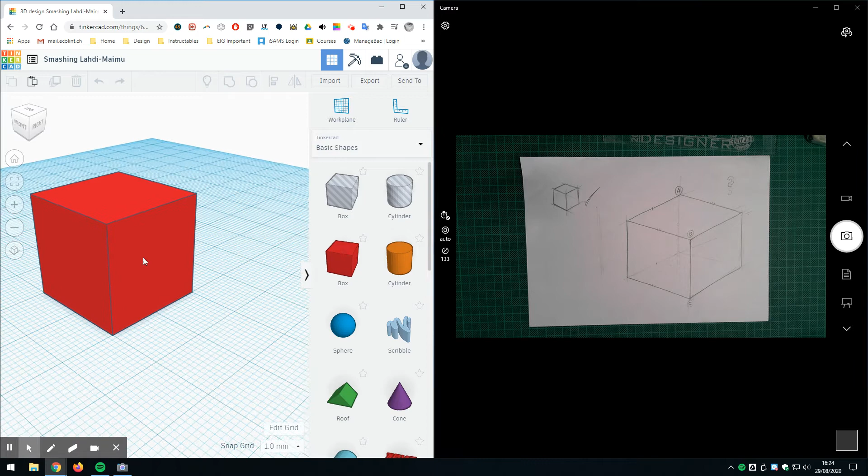Let's spin this around a little and try to redraw it. Shift and right click to reposition it. I was talking about points A, B, and C on the drawing, and now I've got my little menu here. Let me give myself an A - I'll change the color so you can see it against the red block.

This is going to be B, and there's C down there. So better late than never, I guess. That's how I've translated that to A, B, and C.

Good, right, let's just see - can I hide tools? I want to get the eraser. There we go. Good, that's got rid of those. Oh, there we are, wipe screen clear. That would have been helpful as well, wouldn't it? Oh well, next time we'll try that.

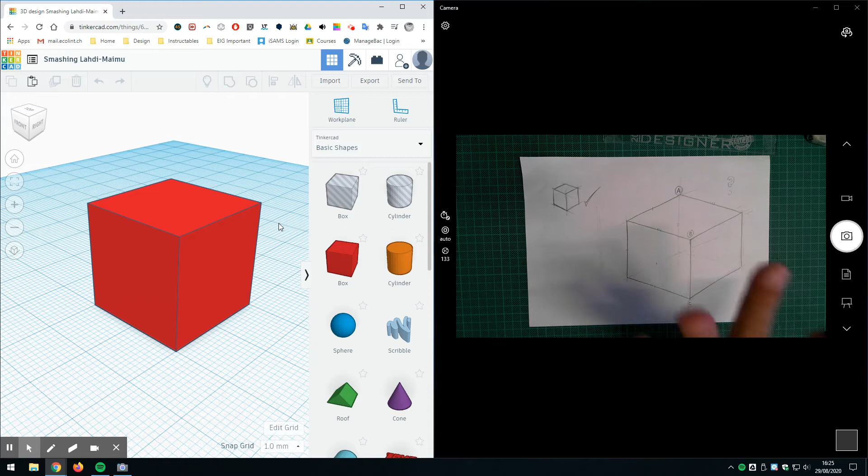Right, okay, so what I want to do now is try and make a bit more of a complex object and then have a go at drawing that. For this I'm probably going to need a new piece of paper - I've done double-sided on this piece here, so let's start a new sheet.

Good, okay, I'm going to zoom out a little bit here and bring in a new box. I think I might just go full size here - that might be easier. Let's click and drag a new box in, and I'm going to place it right there like that.

Again, I'm positioning it quite carefully on the grid here so that they are aligned. What I'm going to do now is drag this up so that they are touching like that. Beautiful.

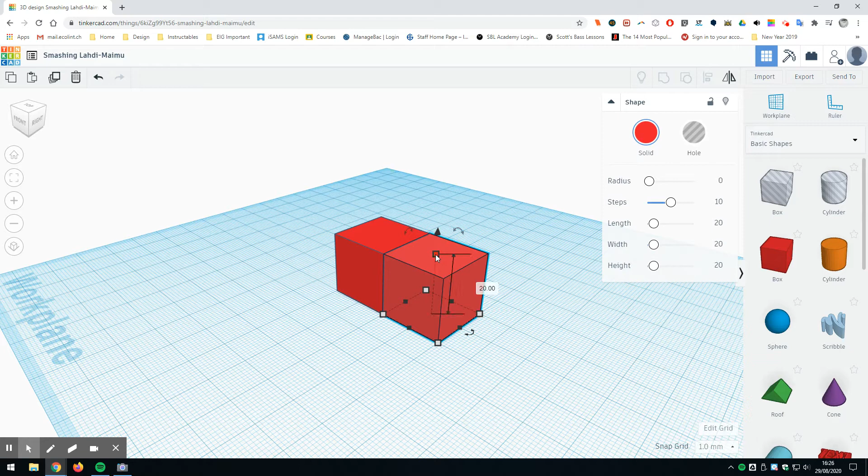Now with this new block selected, I'm going to come to this handle here - this shows it's 20 millimeters in height, and I'm going to drag it down to 10. If that's a problem, I can simply click on that point, click on this text box, and just dial in 10, enter on the keyboard. Now I've got this little kind of series of steps.

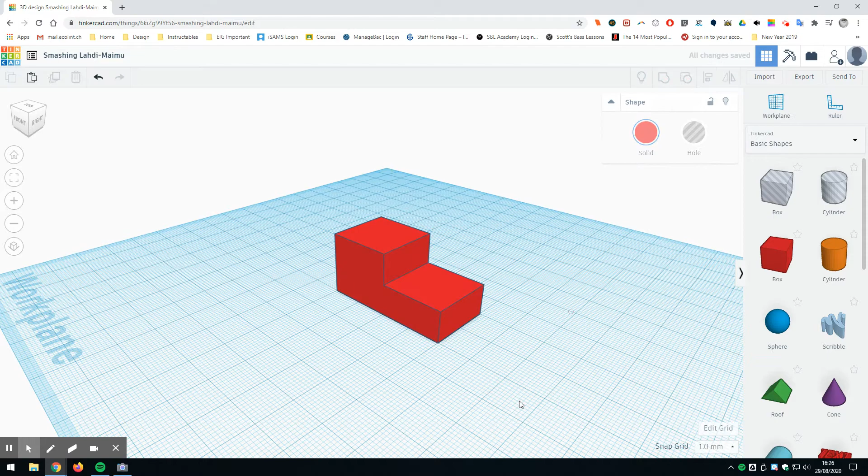The last thing I'm going to do here is put a bounding box around both objects, and I'm going to go to - where is it now - there it is, Group. I'm going to group that together, and that now makes this into one solid block. Okay, that's pretty cool, I'm liking that a lot.

Okay, and I'm going to try and draw this again now in 3D. Let's just select it, and to help myself here, I'm going to make this into a wireframe model. Now, at this point, I just want to talk a little bit more about the wireframe view here.

You can see here that the object is filled in with this gray hatched kind of fill, but you can see all the wireframe views here, and they're not indicated in terms of which is in front and which are hidden lines behind. Sometimes you get the hidden lines as dotted lines, which does help understanding a little bit, but in Tinkercad it doesn't do that.

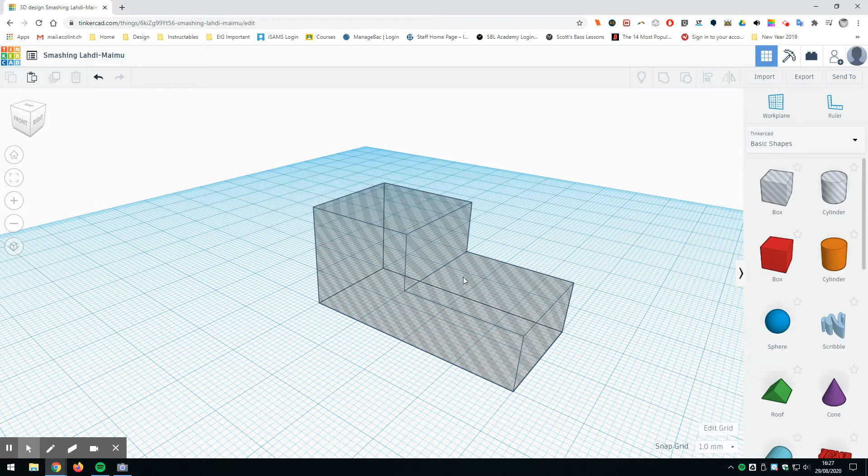But as I right-click and rotate this around here, I can get into some very precarious scenarios. For example, if I try to make those two corners align - if I do that, and if I zoom out now, I've got to be careful here as well, because at the moment I am in perspective mode, I want to go to orthographic mode. There you go.

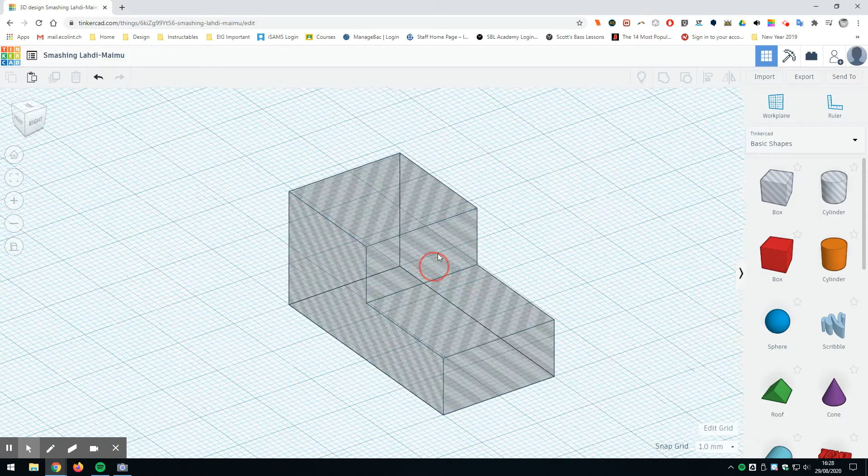Now if I zoom in orthographic mode, things don't change. There, that looks pretty good there. If I do a drawing like that, and now if I look away from the screen and then look back, is that obviously a 3D model?

Or what I see actually here is like a diamond shape, and is that what you call a rhombus? Not a rhombus - it's a parallelogram, that's what it is. Remember your maths. And there's just a weird polygon, isn't there?

Really, there's an equilateral triangle - no, isosceles triangle, equilateral... I think it's an isosceles triangle. Equilateral has equal corners, doesn't it? And an isosceles triangle has symmetry around a midpoint. I hope I'm right there. And then here's another one.

Okay, but it doesn't look like a 3D object. If I click on this and make it solid again, now it does look like a 3D object because I can only see the visible edges and visible faces. I've also got the sides of the faces of the 3D object shaded in slightly different tones of color to make it look more 3D. Anyway, we'll come back to that later.

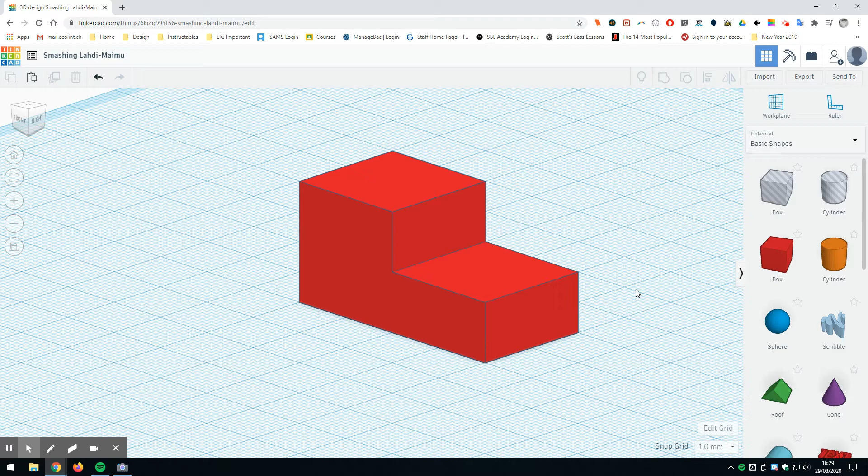But if I go back to the 3D view, this is somewhat confusing. So what you can do with this is what's called isometric. If you have a drawing like this, where these angles are 30 degrees to the horizontal, this angle here is 30 and this angle is 30 to the horizontal line, then you can get these very precarious situations.

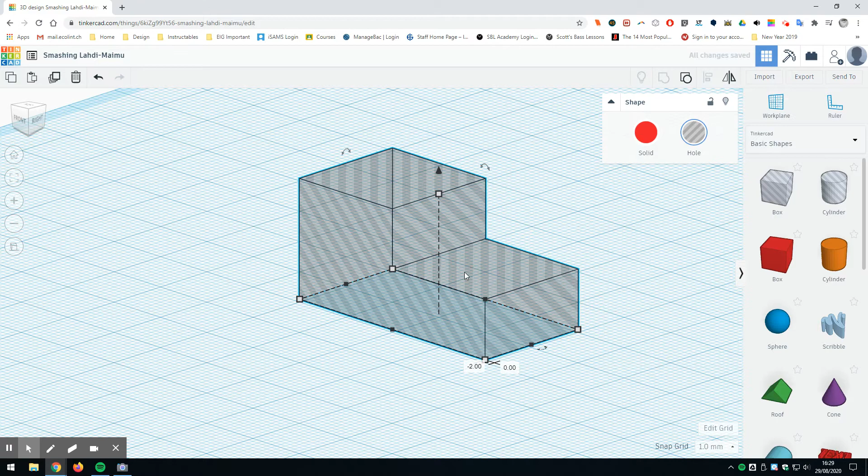So for 3D drawing, I'm going to pull it slightly - whoop, slow down there. I left clicked, not right clicked. I'm going to right click and take it slightly out from that angle just to make it a little easier to see as a 3D shape. Okay, enough of this chit chat. Let's just bring in the two screens again.

And here we go, let's try and draw that. So what I've got here then is a vertical edge. Just rotate the paper. Okay, I'm going to have this long line down here.

This is also going to be - I'm going to make this a long line as well, the same length. This is what I'm going to do: they're going to be parallel, same length.

And then let's just think to myself, I want to make it so that this length here - if I get my pencil, go from the tip to where my thumb is for the height of that line, and then rotate this around like this, put a point there, then do the same again, put a point there.

I'm kind of getting the proportions of the shape correct. Let's now do a vertical line there. Let's do a vertical line there.

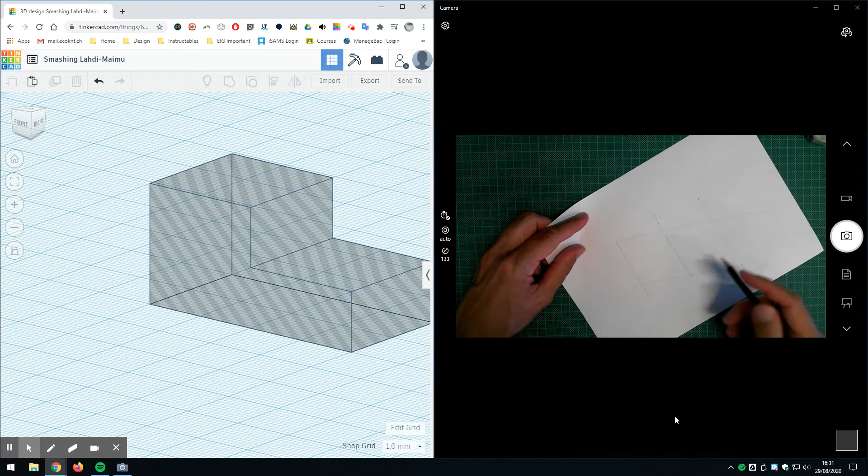Okay, now I want to get a midpoint between these two lines. So for this, what I'm going to do here is, in the same way, just measure that from thumb tip to pencil point from both sides. That's about in the middle, I'm okay with that. And then let's just try and pull that down like that.

Aha, okay, so what I've now got, effectively - look, I can use my drawing tools now. Oh cool, what I've done is I've done a line there. There we go, I've done that line there. Okay, I've done that line there. I've done that line there. And I've done that line there.

And that line goes all the way up, but obviously I don't want that line there - you know, I don't want to have that. In the long run that will disappear. Oh, and I've done that line there. Oh silly me, there we go.

And again, in the long run, that line there will disappear, and I'll get rid of that line as well. That's eventually what I want, but at the moment, remember, I'm doing just construction lines, so all these are faint lines.

Okay, so let's have a see. Now what I'm wanting to do here, let's go for a different color just to make things really exciting. Now what I'm going to do - oh dear, mouse control fail there, wasn't it? Okay let's just try and do that again. There we go, that's what I wanted to do.

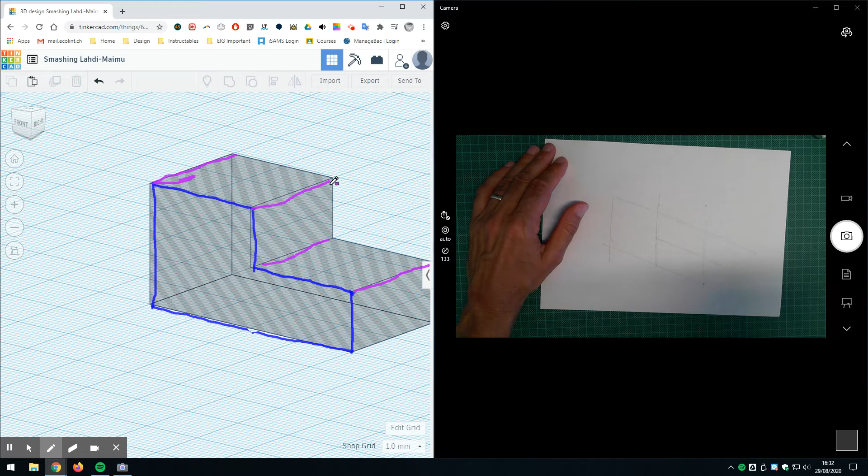I wanted to do - whoops-a-daisy - all these parallel lines. They should be parallel, they should be on the 3D model in Tinkercad. Oh dear, that was a fail.

Okay, so back to the drawing here. Let's just try and take this across there, there, there, there, there. I felt as if that was a lot more successful doing it on paper, freehand, than it was trying to do it on the computer.

Now, in terms of this distance here, look, I'm now going to get my pencil here. That's from this corner to the midpoint. Let's bring my pencil around to here.

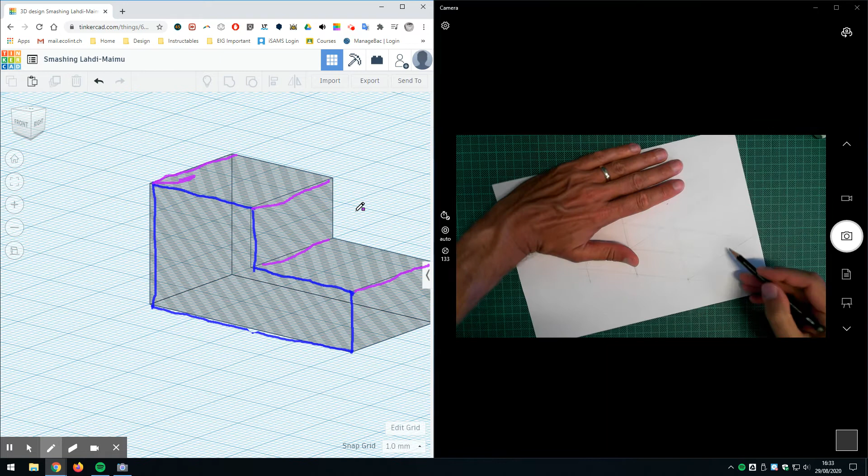There, that's what I want. It's going to be that point right there. Okay, let's take a vertical line up there.

Magic. Let's now, I've got to be careful here because this is getting confusing. Look, there's this line here. That line there is going to start to cause confusion. Okay, and I want to work from a point here.

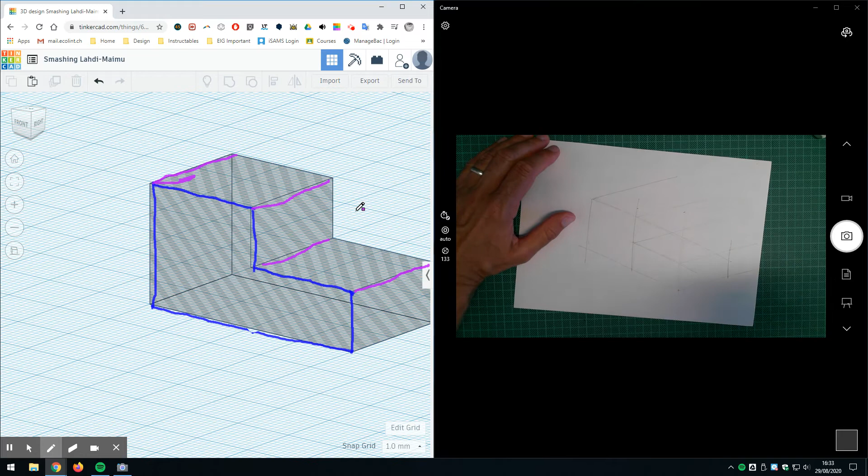Okay, that's this, let's have a see. I'm going to have to just clear the screen here. Let's go there and I go clear. Oh, how cool is that?

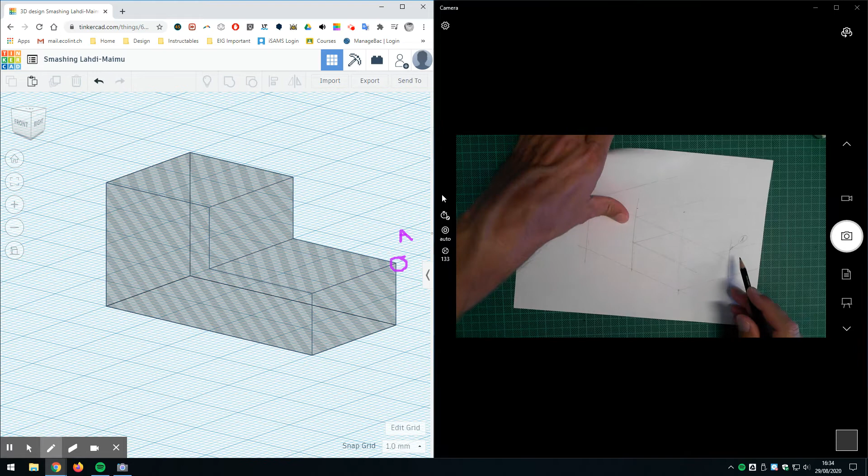Okay, then let's just zoom out here, pan across. What I'm looking at here is this point here. Look, I'm going to call that A, purple A. Okay, this here is A. Okay, so now what I want to do is pull this line back.

Now in the same way, because I did, let's see, I've got a line to pull back here as - no, I've got this line here. Yeah, what I'm going to do here is just get that distance again, that front distance there, and then just try and use that to try and map the rest of this out.

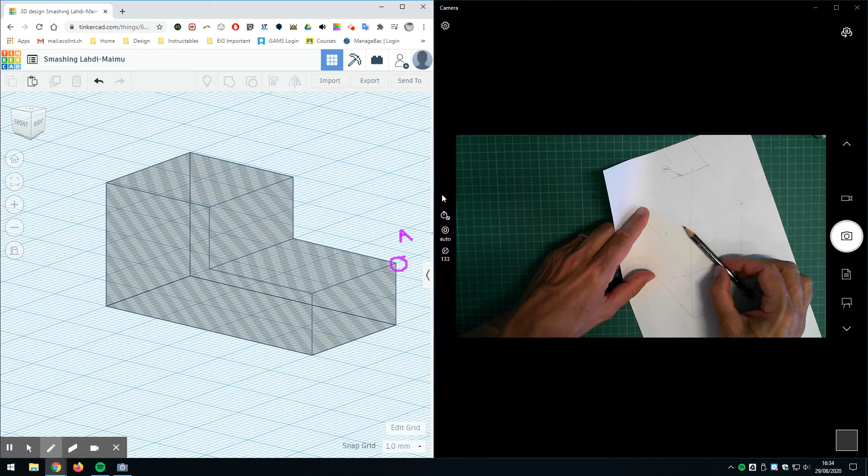So that's going back to about there, as it turns out. And then here, well, this, yeah, that's going back to about there. So let's have a see. Can I now join this together? That's going there, that's going vertically straight up. And then that's going there.

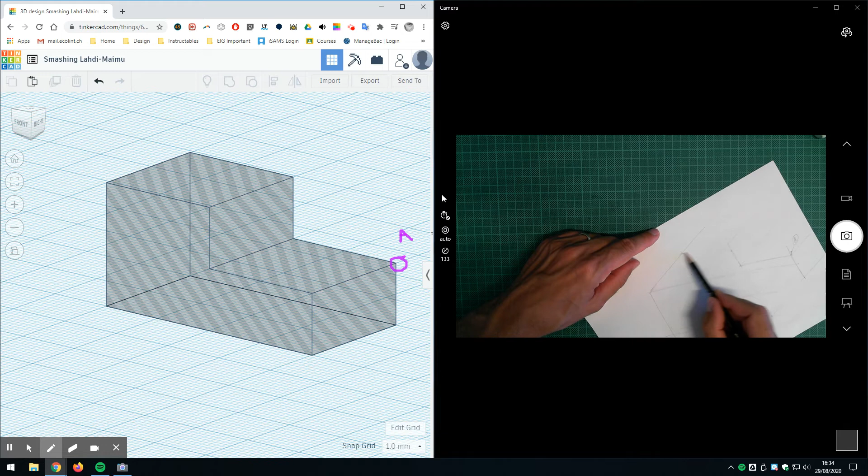Yeah, I'm liking this. Okay, let's just make the webcam here a little bit bigger so we can see all of this. And then now I want to go over the lines. I want to keep my visible edges to this 3D shape.

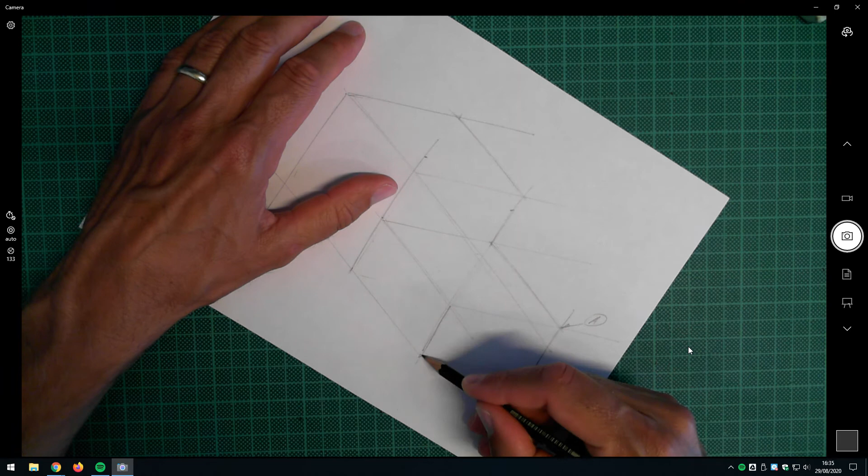Not happy about what happened at the bottom there. But this is nice. I'm not rushing any of this, just taking my time, building up my confidence.

Here, I want to avoid doing this pencil stroke here because I've got all this graphite under my wrist and I don't want to smudge the drawing or get graphite onto my palm. So I just rotated the page around there.

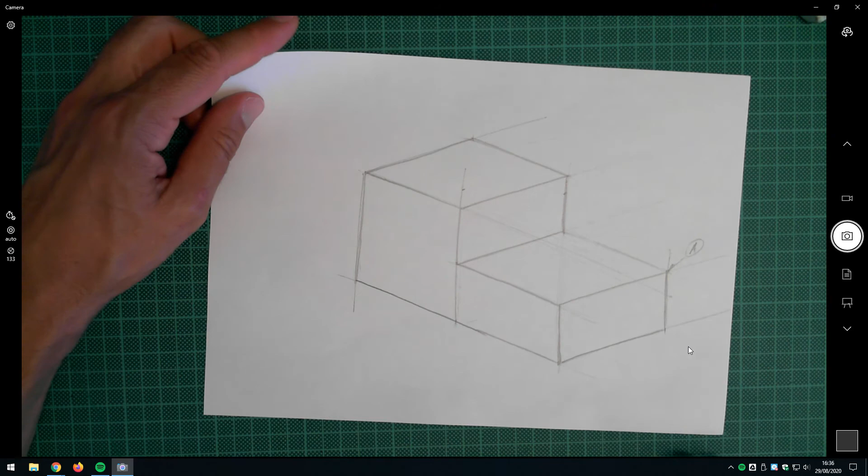That is looking really good. I could go over some of these lines a little bit more firmly, really make them kind of stand out. Okay, but that is looking really nice. So that is my interpretation of that drawing there.

Now notice, of course, that some of my construction lines are a little bit too solid there. So really that construction line needs to go. That was just causing a bit of confusion.

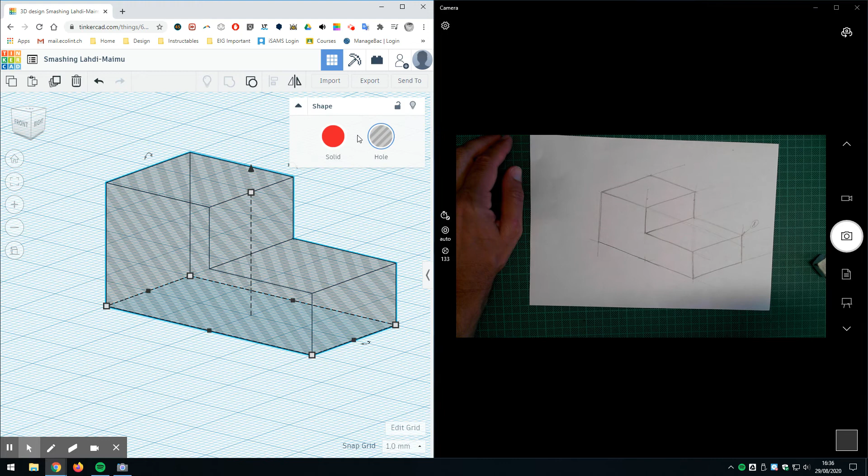And now if I come back to this view here, let's just get rid of the drawing. Let's just go - what am I doing here? Let's select the shape and let's go solid. And hopefully you can see now how the view in Tinkercad matches the view over here on my drawing.

I think that's a pretty close approximation. That's pretty good indeed. So in the same way, I've done mine quite big here. You can experiment by doing these an awful lot smaller. The smaller you do them, the easier you should find them.

So let's see if I just try and do this, because when you're doing it small, you can kind of get these proportions correct a lot more easily. I'm just going to try and create this out here, something like that, something like that. That's going to be the midpoint. That's going to come down to there. That comes across to there.

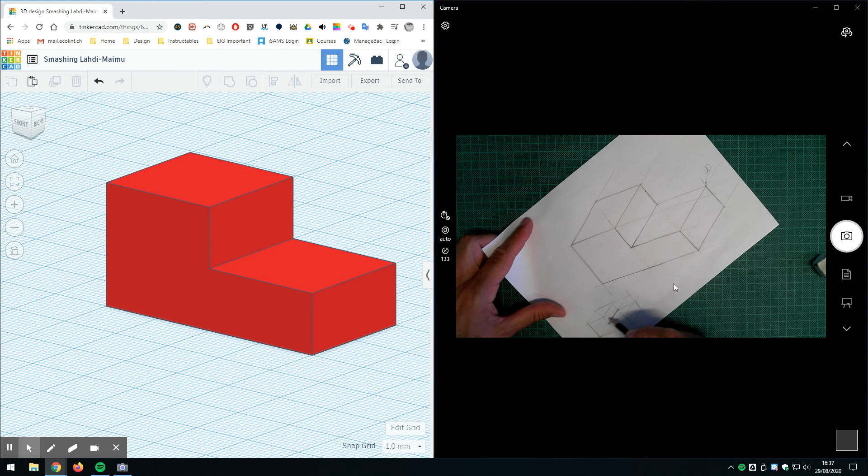Okay, that's good. That small scale is much quicker and much easier to do than something large scale. And I would suggest with larger scale things, you just work with this technique of using your distance from the tip of your thumb to the tip of the pencil as a kind of measuring stick to make sure that things are all in proportion.